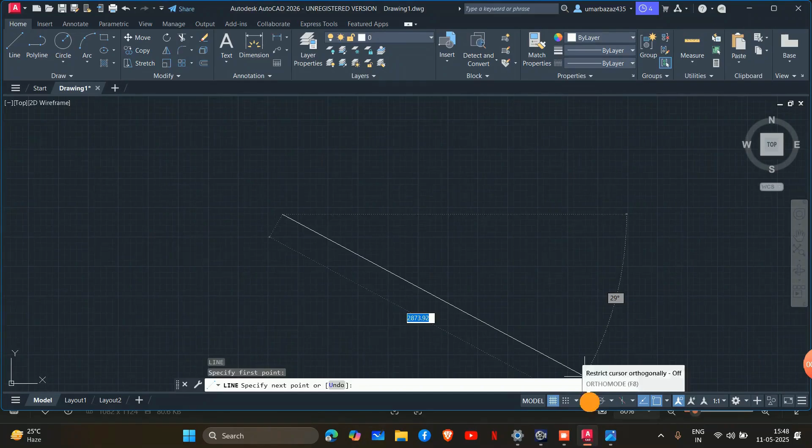First, we will draw this fork end of this gib and cotter joint. So this is 152 and this is 64. These are the dimensions of the rectangle we will be drawing first. Okay. So let me draw the line. Ortho should be on. This is 152. This is 64. This is 152 and 64. Enter. This is the rectangle.

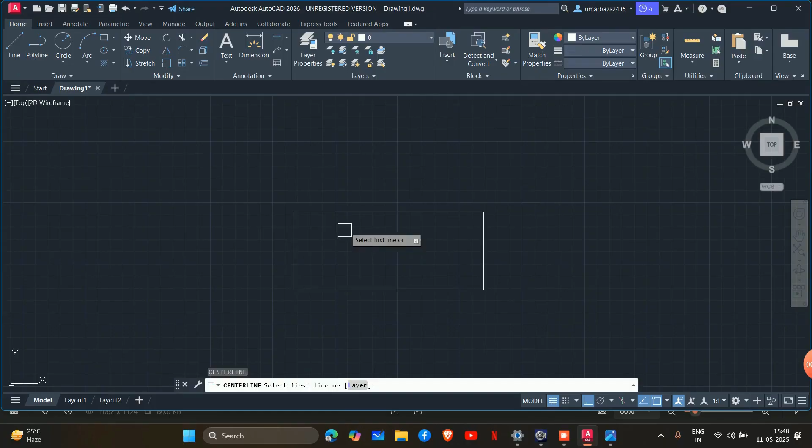Now we will need a center line. So CL is the command. Center line. This. This. We got the center line. After that, what we have to do is the offset. And the offset distance is given, this 13 here. Okay, so we will offset now 13. So offset 13. This line towards the inner part, this also towards the inner part.

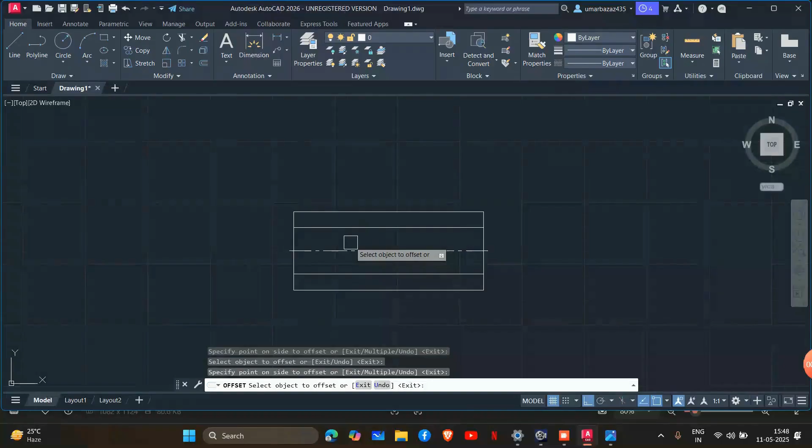Enter. Now we need to trim a few lines. So TR is the command. This line, this line, this line, this. Enter. So we got this portion. Okay.

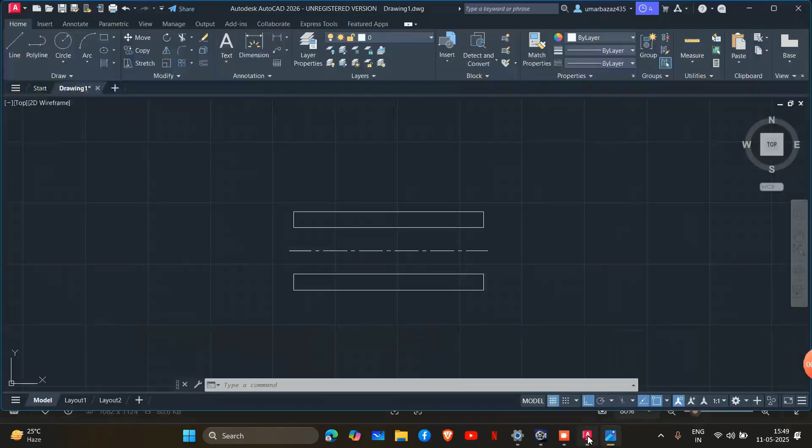Now we will draw this inner part of the fork. What is the distance? The distance will be this 42, 47, 42 plus 47 plus this 38. Okay, not the 63. This is the complete length of the fork. And we have to draw the inner portion only. So 42 plus 47 plus 38 comes to be 127. So we will draw 127.

We can also delete this line, this line, this line, this line. Now line 127, enter, line 127, enter. And we will join these lines. Now remember we offset this line 13 mm. So we will also take a line here of 13 mm. So downwards 13 mm. Similarly, upwards 13.

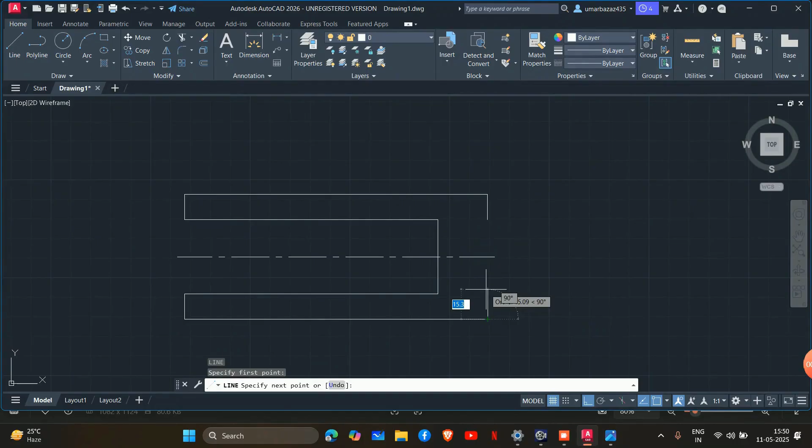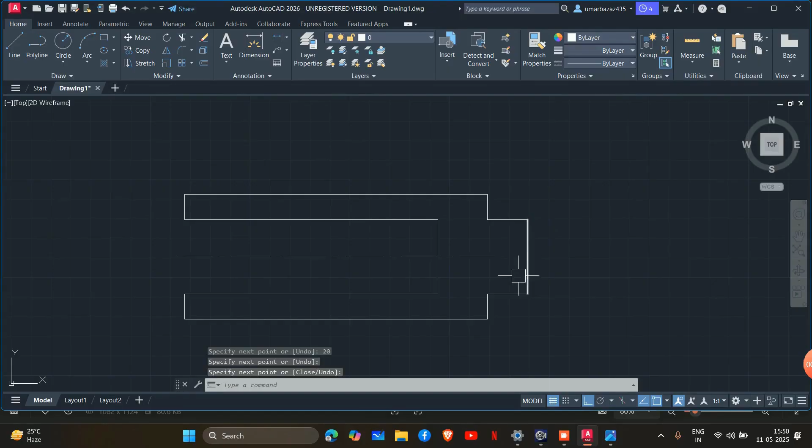Now the length which we will take in this is up to your choice, how much length you want to extend this. So we will take it 20. Here also 20 and here also we will extend 20, and this will automatically be 20.

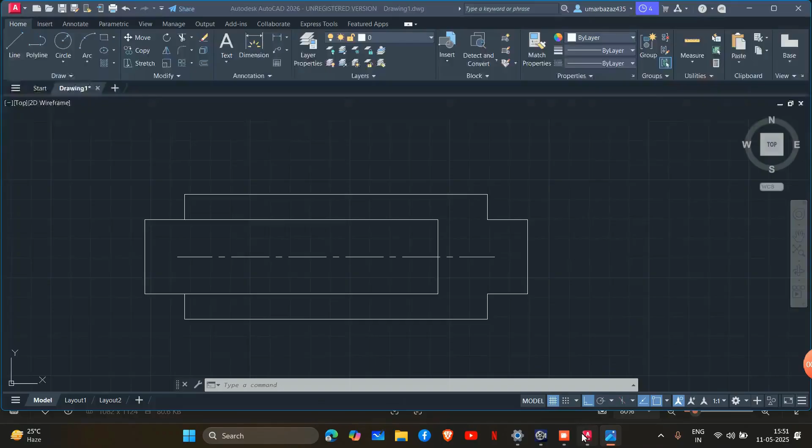Now you see these ends of the fork are broken and the rod is also broken. So that means we have to show zigzag lines. I will go to ByLayer, other, load, all the way to bottom, zigzag, okay. And we will also be needing these dotted lines. So I will also load it here only. Okay.

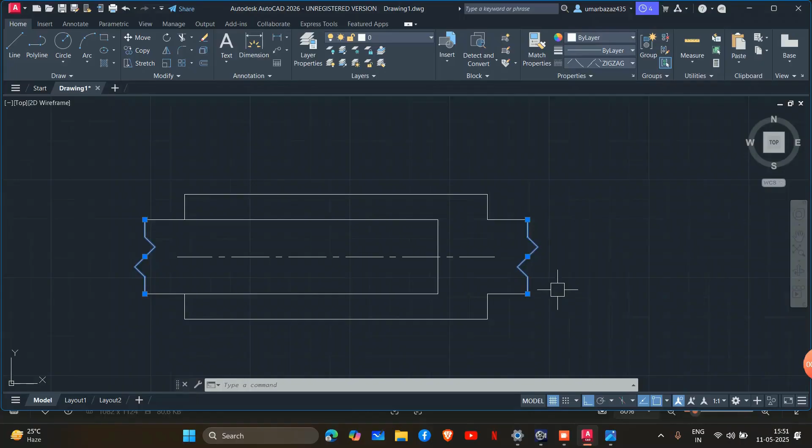Now select these lines to zigzag. Now this is too much zigzag. So what we will do, we press Control plus 1 on the keyboard. The line type scale will change to 0.3. So this.

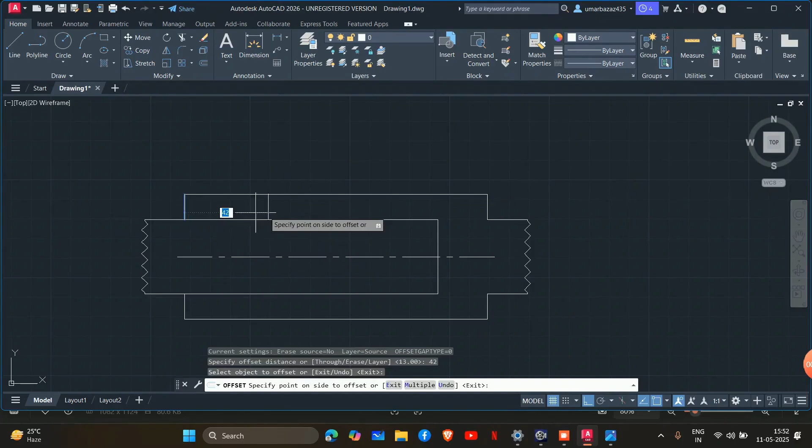Now what we will do, we will mark the distances on the fork. This 42, 47. Okay. So we will take offset 42. This line will be offset 42. This will also be line 42. And enter, again enter to repeat, 47 now. 47, 47. But these lines need to be dotted.

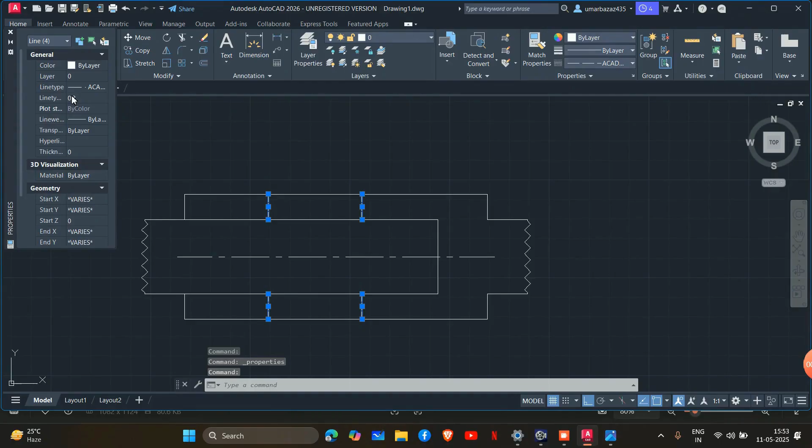So we will use this dot line. But they are not visible, so we will press Control 1, line type scale 0.3. Now the dot line is visible. Now our fork end is ready.

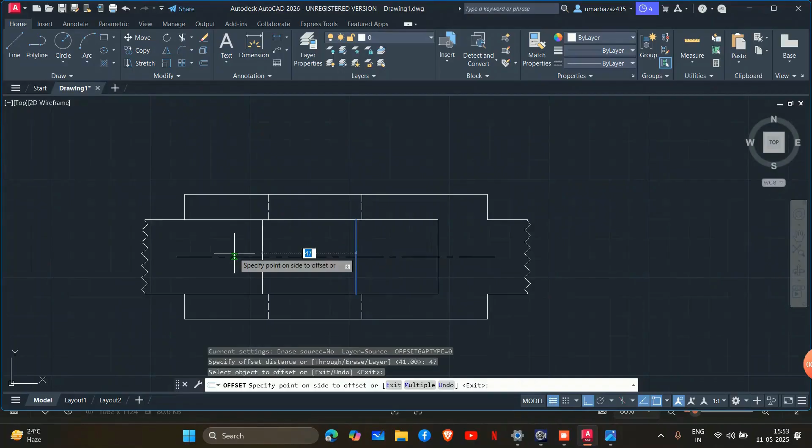Now we'll draw this rod. If you see the distance, first is 41, then it's 47. So we will draw these distances. Offset 41, again enter 47. So you can check here whether your drawing is correct or not. The distance here should always be 3 mm. This distance, as well as this distance. It should be 3 mm, and it is called the clearance of the joint.

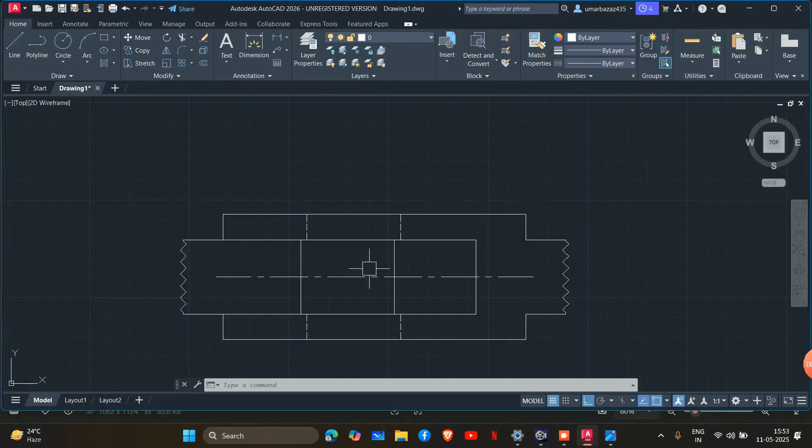Okay. Now what we will do, we will extend this. EX is the command. Both ends extend. Now we have to do this cotter part. If we see the distance, the height of the cotter is 136. So we will go half towards the upper region and half towards the bottom region. So we will do that.

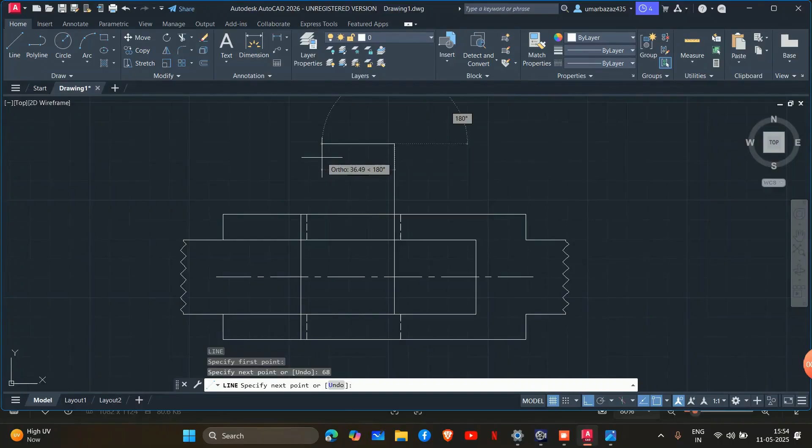Line. Here we will go half of 136, that is 68. Enter. And this distance is given as 28. See, this is 28 here. Okay. Now the bottom distance is not given. Wait, I will show you how. First we will go towards the bottom as well.

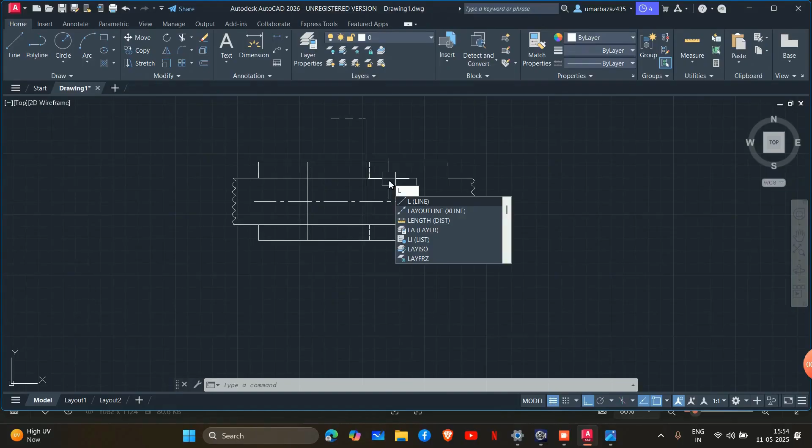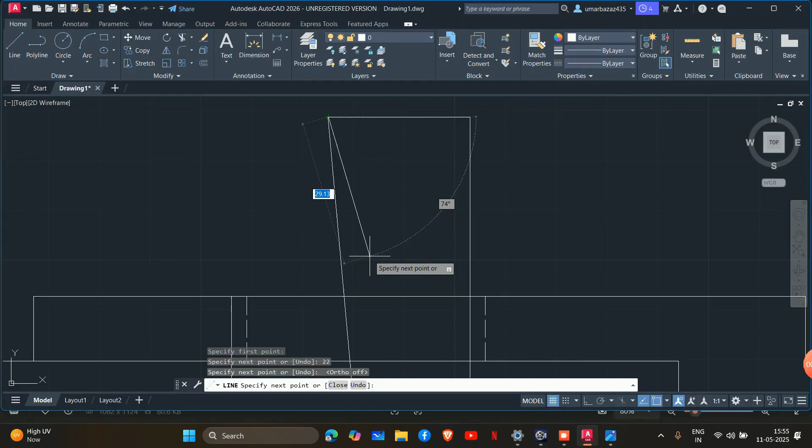Now this distance is not given, so how will we match these ends? What we will do is take an extended line up to here. Then if you see, this distance is given; the thickness, we can see, is 22. So we will use this thickness. The line to here, 30, sorry, 22. And I will not use ortho here, so that we can join these lines here. Okay, it's done. Now we will simply extend this line.

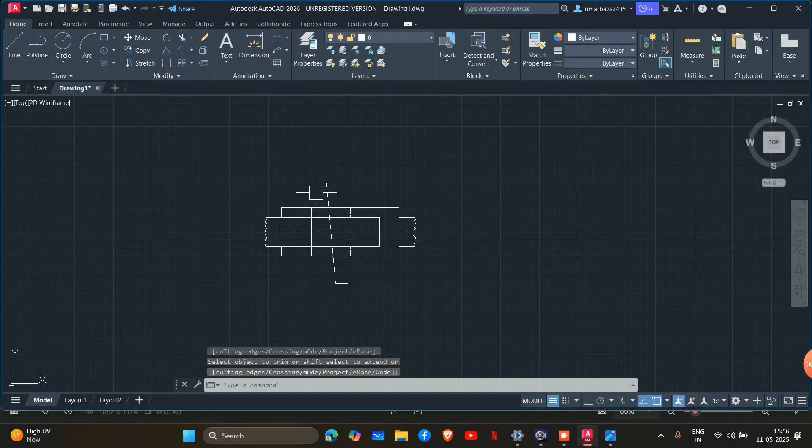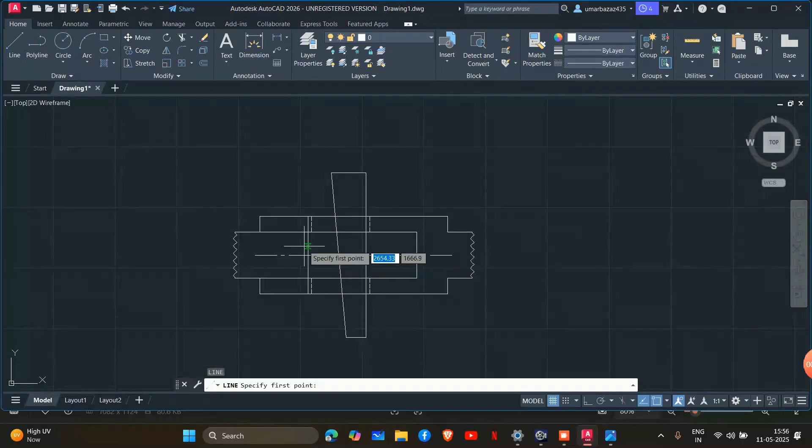Okay, so we get this cotter, and we will extend this line. The cotter is ready. Now we have to draw this part, the gib part. So the distance we need is this 14. The parallel distance is 14 mm. We will draw a 14 mm line. We will take 14 mm from here.

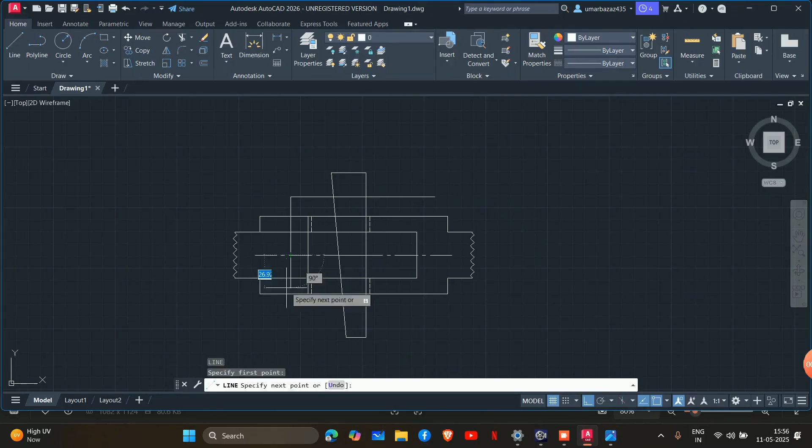Ortho should be on. 40, and if you see the total distance, it is 96. 96 half is 48. So we will go 48 upwards up to this line, and 48 downwards after this line. Now most of our job is done. Now we need some trim work.

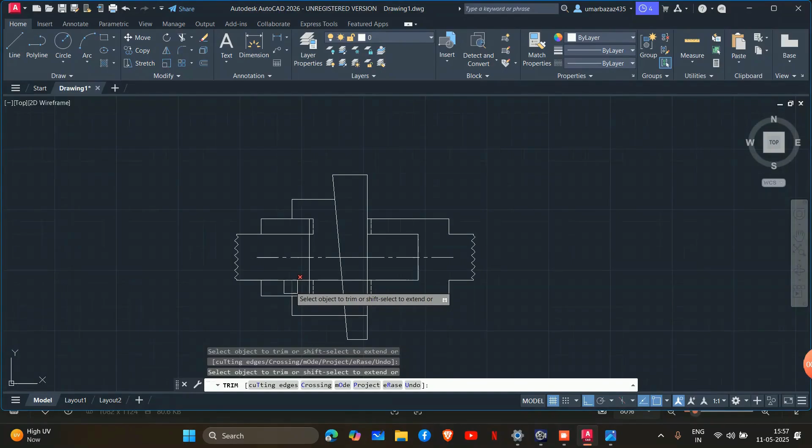This line, this line, this line, our center line, everything gets deleted. This line also, this line also. Okay, this line also, this line, this line, this line, and this line also, and this line, and done. Now we need to select this line.

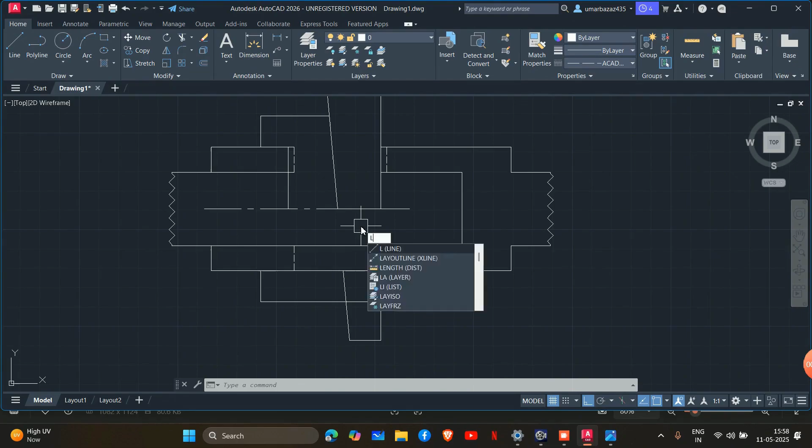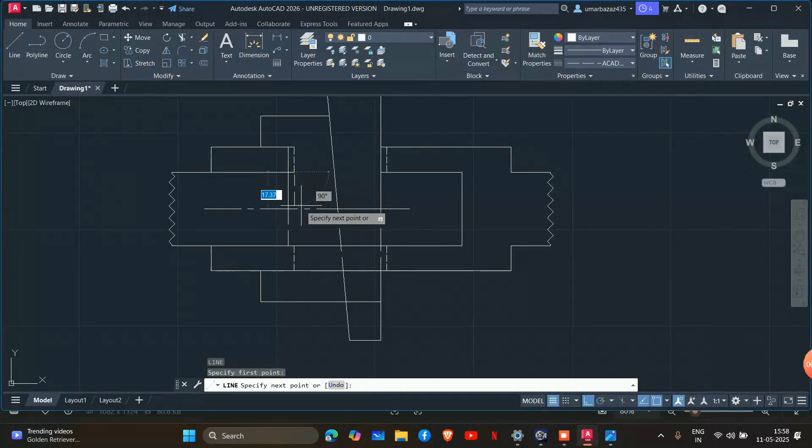Ortho on, join this line. Ortho on, draw this line, this line, this line, this line. Continuous. We'll delete this line once, as this is not dotted. That is, we can see this line when we are drawing the upper half section.

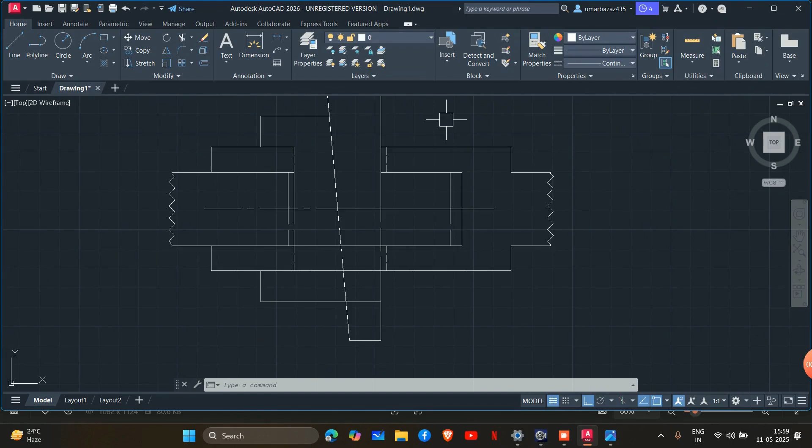Now we need to delete some lines. Trim this line also, and we need to provide a clearance of 6 mm. So offset 6. We'll make a line, extend it towards here, and trim. Then again choose the dotted line, the dotted line here. So most of the part is done. Oh, we forgot to trim this line.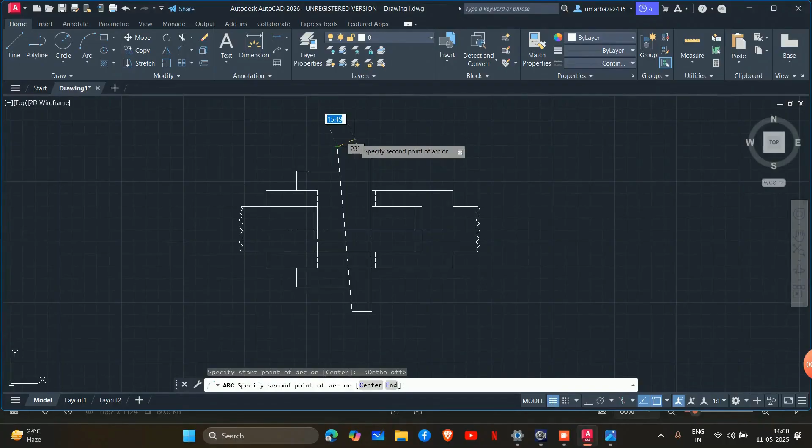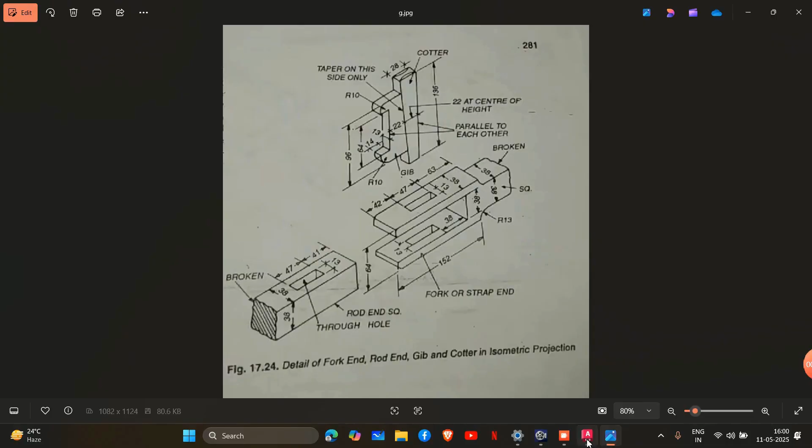Now we need to draw these arcs. We will select the arc here, 3-point arc, and draw the arc randomly. So now what else do we need to do? Fillet. Fillet radius is given. For this, the radius is given 10 and this is 13. So I will do fillet radius. First we will do 13. Click on multiple. Click these lines. And this is done. Press enter, then press enter again.

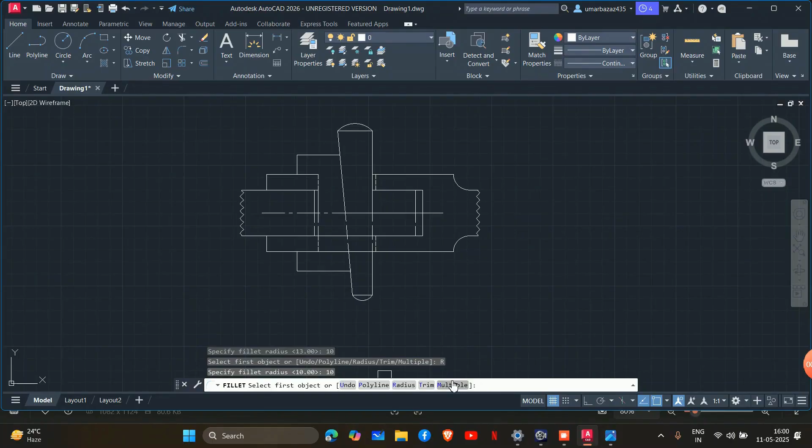So the radius was 10. 10, multiple. This, this, this, this, and this is our gib and cotter joint front view. Anything else we need to do? We can do hatching. Okay.

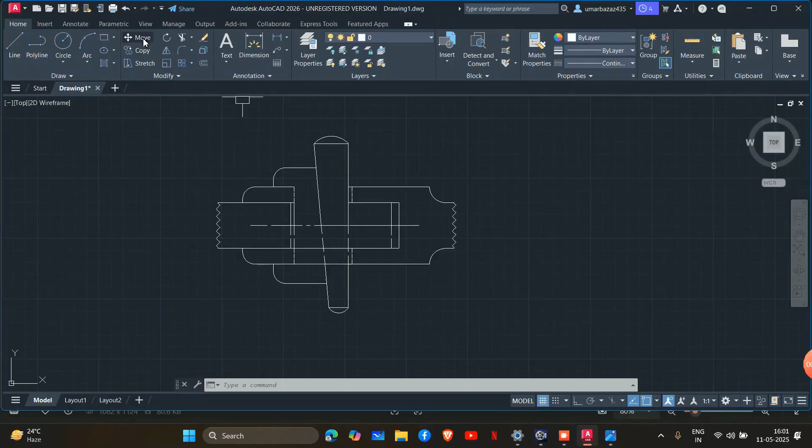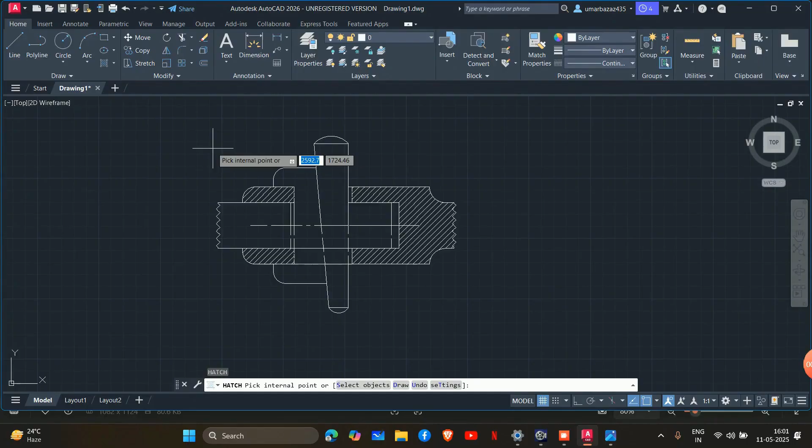Show the upper section. You can go here, here, and here. Enter. Again enter. We'll go here and here and here. But the angle needs to be different. So we'll choose an angle of 100, I guess, to show that it's different. Enter. So this is the complete gib and cotter front view.

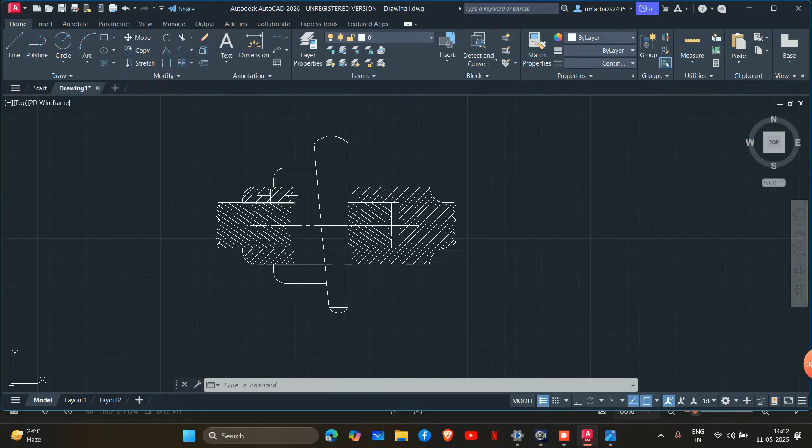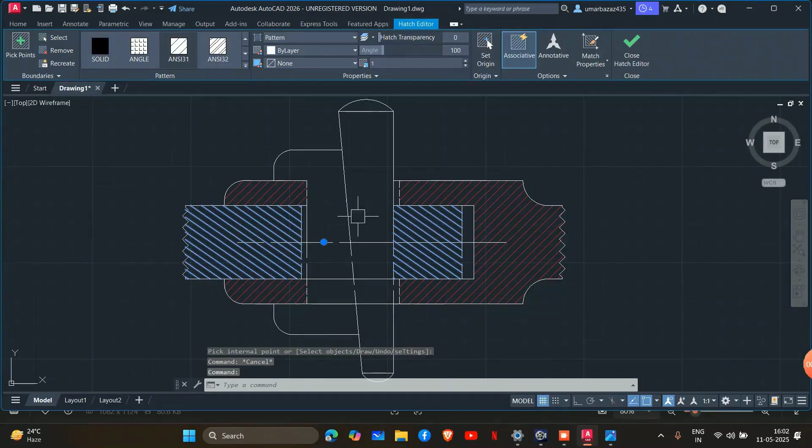Now what we can do, you can also change the color if it is allowed in the examination. We can choose red, enter. This we can choose as blue, enter. So, blue. Looks good with colors. Okay, now we have to do dimensioning.

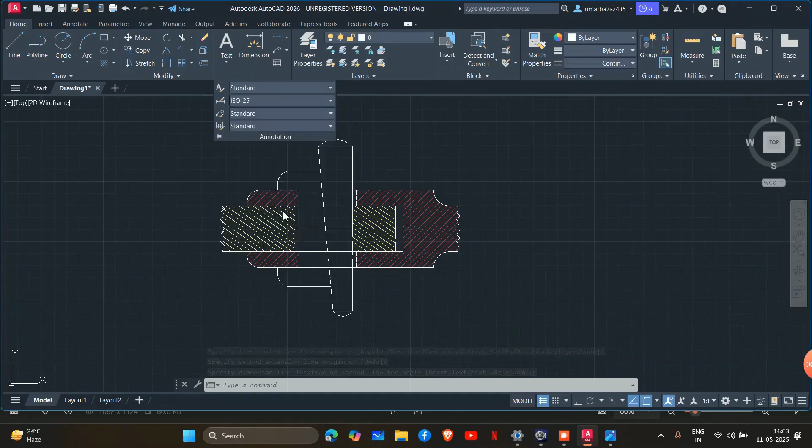So first, this has to be 38. The dimensions are very small. So we will go to annotation, ISO 25, manage dimension styles, modify, go to text, we will set it as 4. Okay, set current, close. Now the dimensions will be bigger. This is 38. Let's show it on this side.

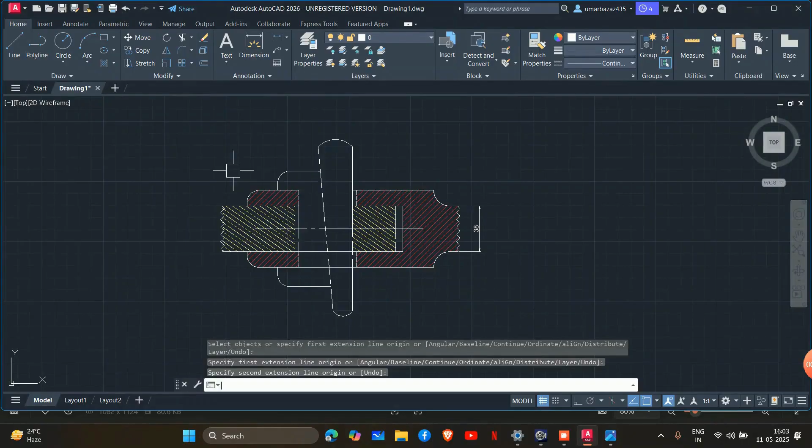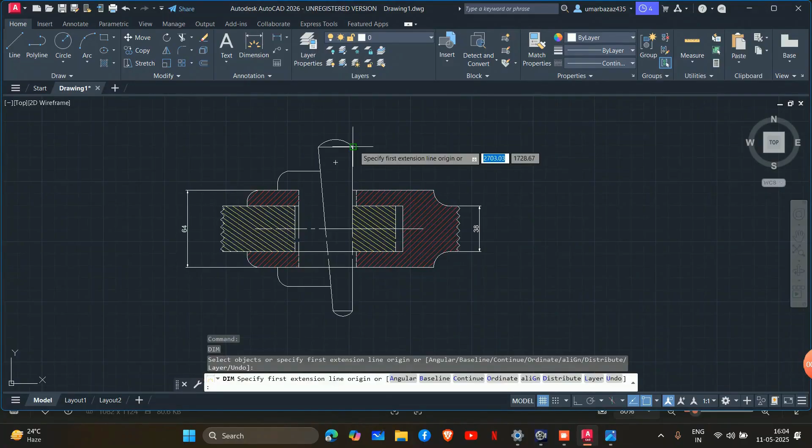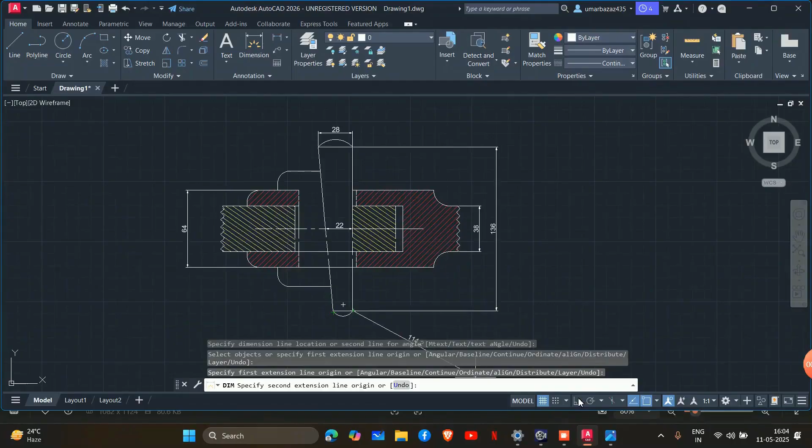64. This is 38 on this one. No need. On this one, 136. Show this one, 28. Show this one, 22. Show this one. Ortho should be on. 16. And show this one, or not.

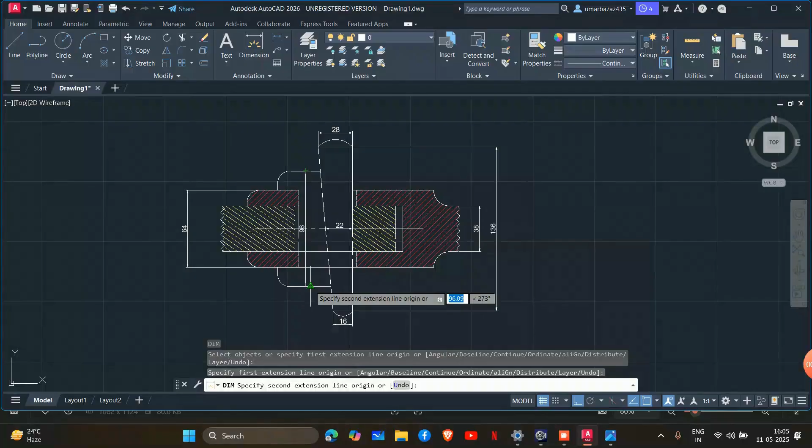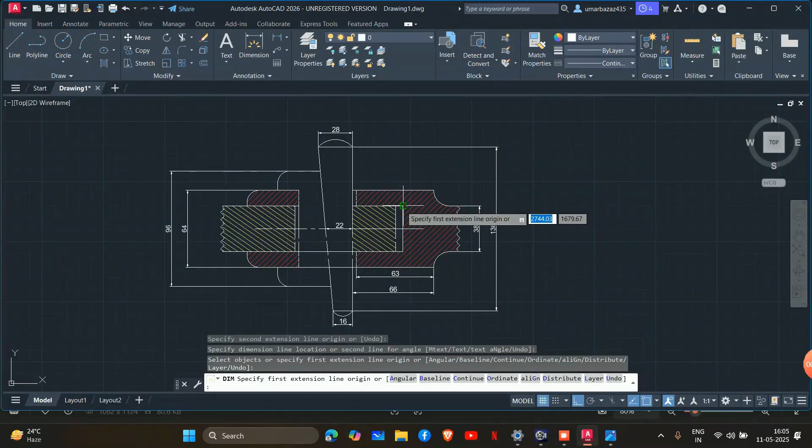And 96. This one also should be shown, 63. And this, 66. And this clearance, 6, this clearance, and enter. Then we go here and choose radius dimensions to show the fillet radius here and here. So this is completely done.

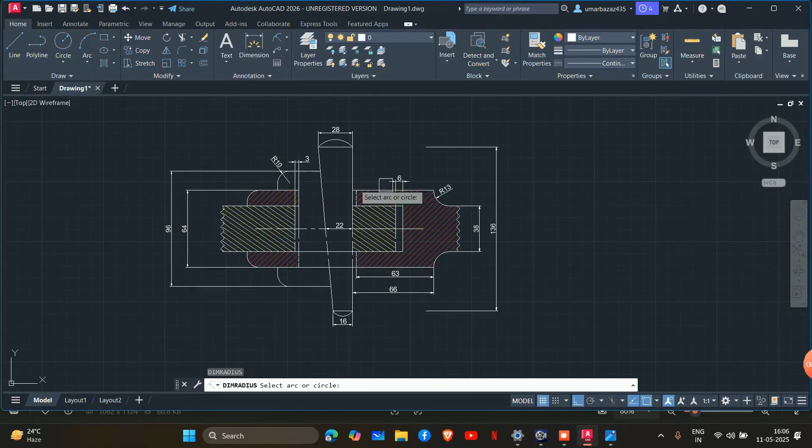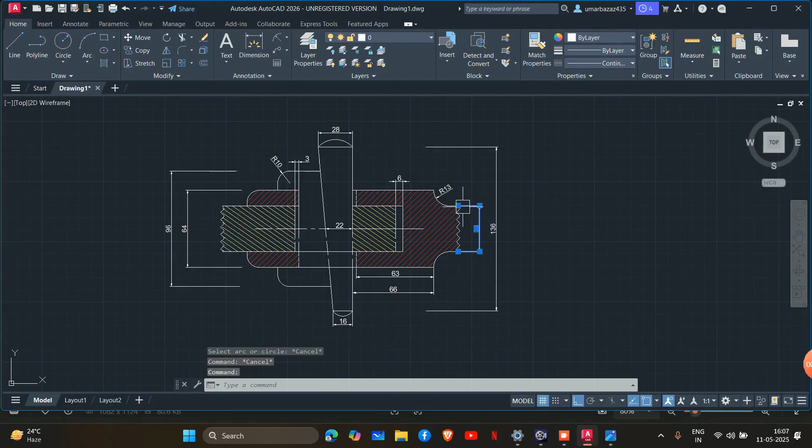And we can also show this here, put it in the red box and go to midpoint so that these two lines are not getting in the way of our diagram. Enter. Similarly for this, enter. What else? This can also be reduced. And yeah, that's all.

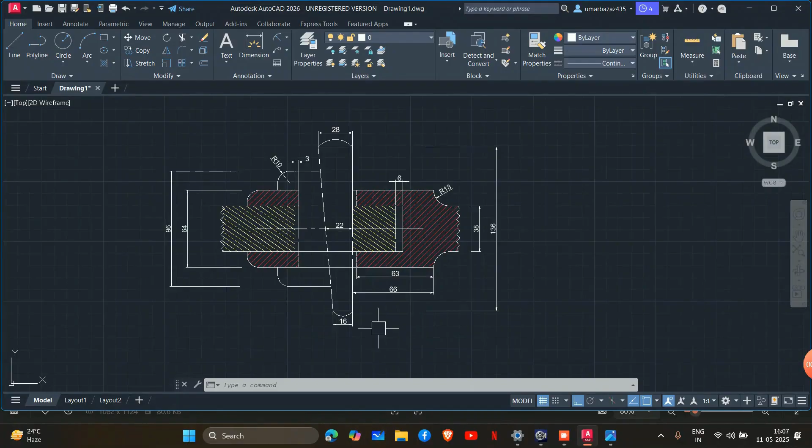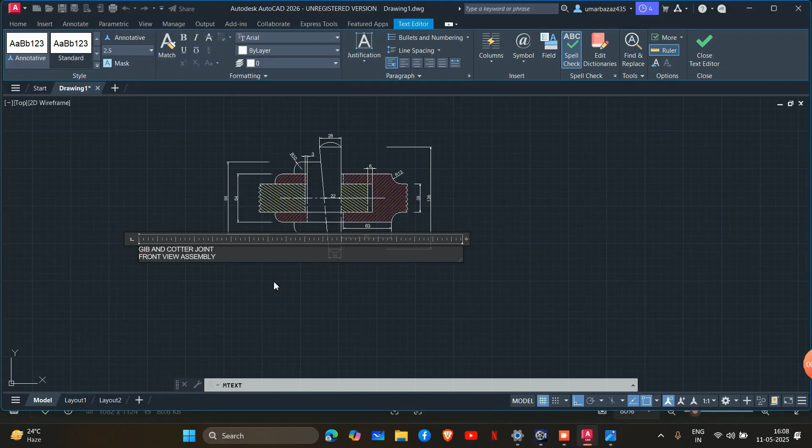And you can mention here. And we can make it bigger. Select, go to here, or scale at any point and make it bigger. So this is our complete drawing.